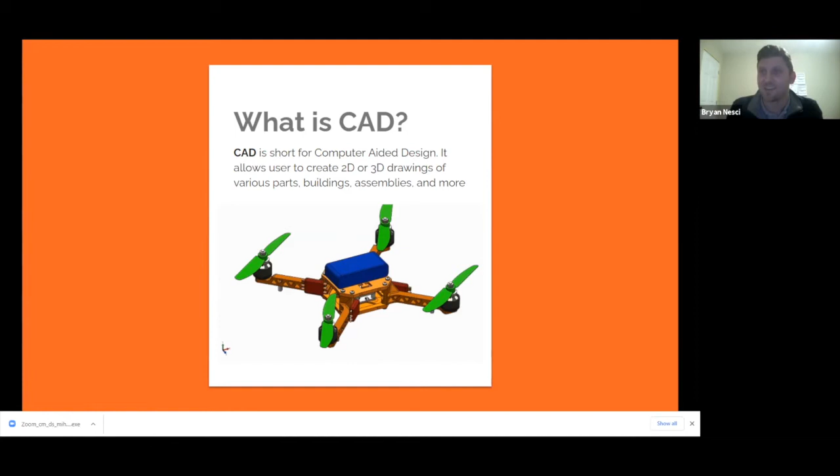So we can see the assembly below. Everyone knows what a quadcopter is. So that is actually an AutoCAD rendering of a quadcopter. You can see that it kind of helps you to lay out all the parts, and you can actually build and assemble items like a quadcopter in the computer program by designing each individual part.

So it's like a language. And like anything else we do in the world, we have to learn the language in order to communicate. CAD helps us communicate ideas to the world. We have something going on in our head, some idea, and it's really hard for me to explain an idea to you without sometimes showing you what it looks like. So that's what CAD helps us do.

So that brings us to the next part. Who uses it then? Who uses AutoCAD to convey their messages? What kind of careers are out there? What can I do with this? So like I said, in engineering, AutoCAD is the first thing that you usually learn when you're a freshman in college.

And so for mechanical engineers, you're usually in the top left corner, putting together mechanical parts. This is an assembly of a bearing sleeve. Someone designed this assembly, and you can see that it's kind of pulled apart, so that's the way we can visualize what each piece is. It's labeled — it has all the parts labeled, it has the base labeled, it has everything labeled.

So mechanical engineers, civil engineers, biomedical engineers — engineers who are designing pieces that go inside of your body, whether it's a fake shoulder or a fake knee — they're designing it first on AutoCAD before they ever bring it into the real world. Now, on the bottom left, we see this open layout of a house.

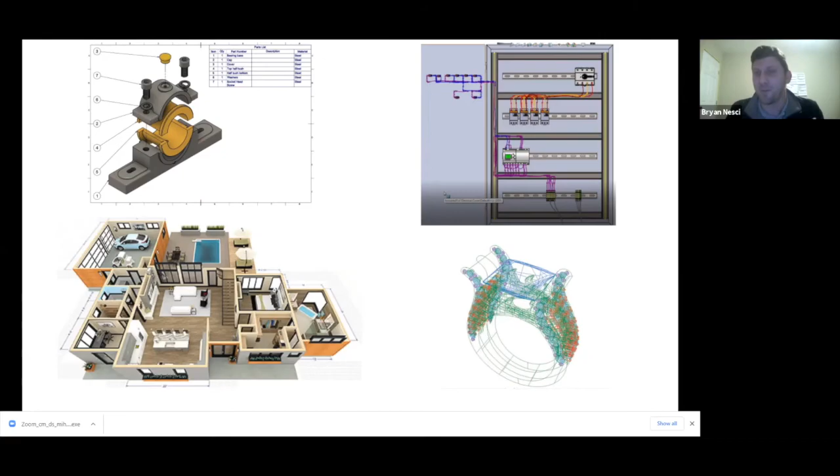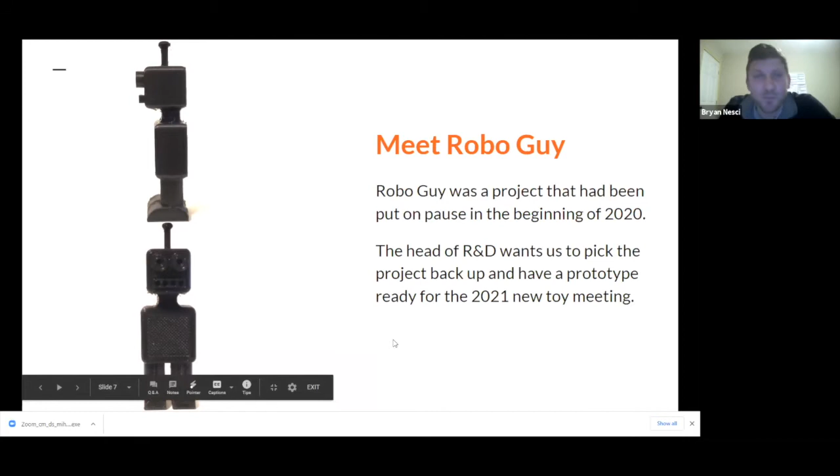So let's take a look. Let's meet Robo Guys. This needs to be launched in 2021. So what we're going to do is follow the engineering design process.

So ask, identify the need and constraints. He already gave us that this needs to be launched pretty quickly, so we need to prototype this fast. We have the original unfinished product.

And he also said that we needed to add something. We need to add an LED screen to the front. So let's keep that in mind. Let's jump to the research part together.

All right, so what I'm going to do right now is take a look. I'm going to switch my screen over so you can see what I'm doing. So I'm going to get it out of present mode, and we're going to put together a better picture of who this guy is and the measurements of him.

So I have some of the measurements put together. We're going to break it down piece by piece and get a better idea of exactly what this guy is in terms of all his measurements, so that we can take it and put it into AutoCAD and fix it up and put whatever we need onto him or modify him the way we see fit. So let's do that now.

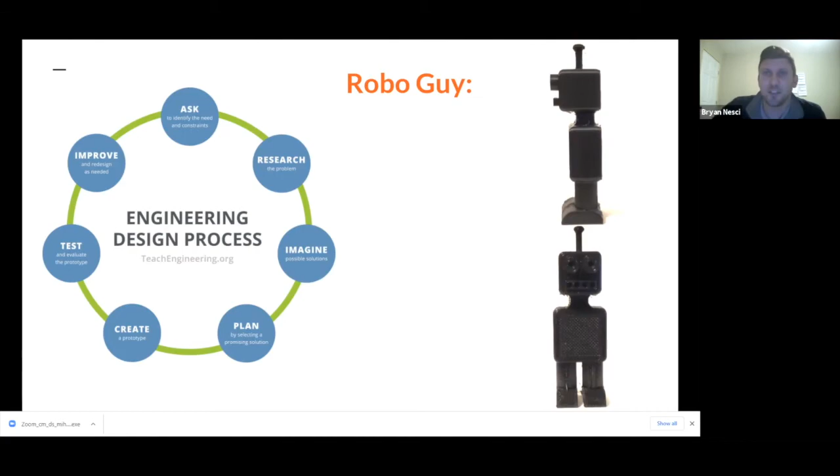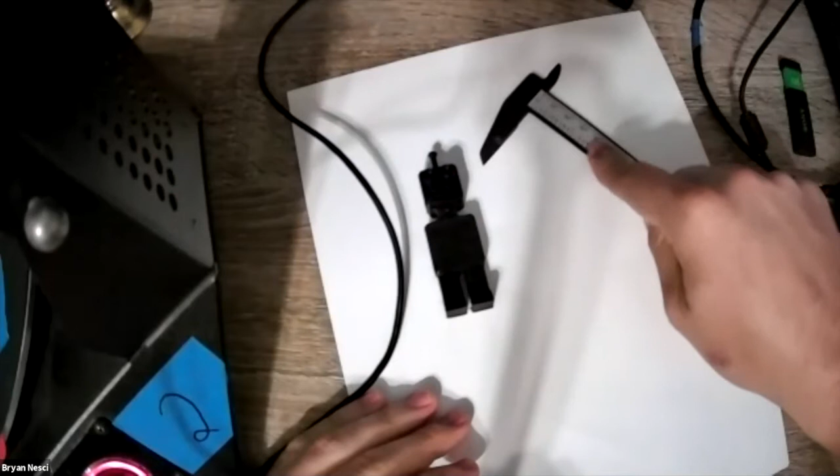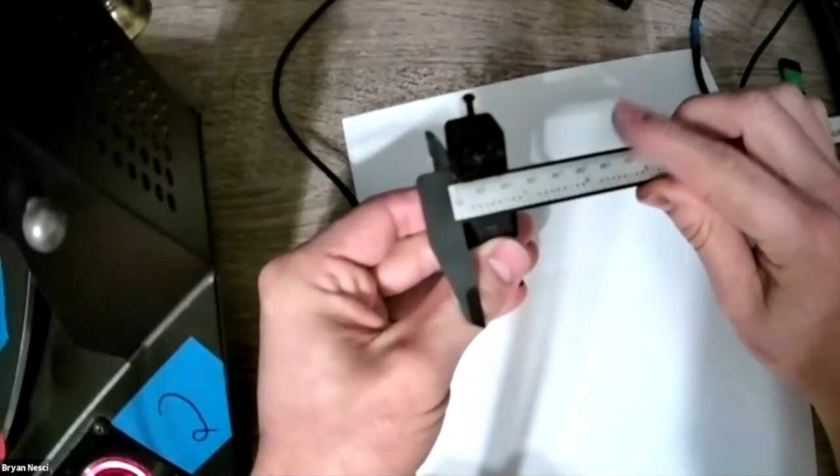Okay, so here's Mr. Robo Guy. What I have here is a caliper, so this will help me take measurements. Now I have some of the measurements, but I just wanted to show you what we do. So if I want to take a measurement of the head, I'll put it like this, and I'm reading in millimeters. Right now it's reading 19 millimeters.

So what we're going to do is create a profile of the robot. I want to break it down into its main components. We have his head, which includes his antenna, his eyes, his mouth, and we'll even say his neck part. Then you have his main body, two legs, and his feet.

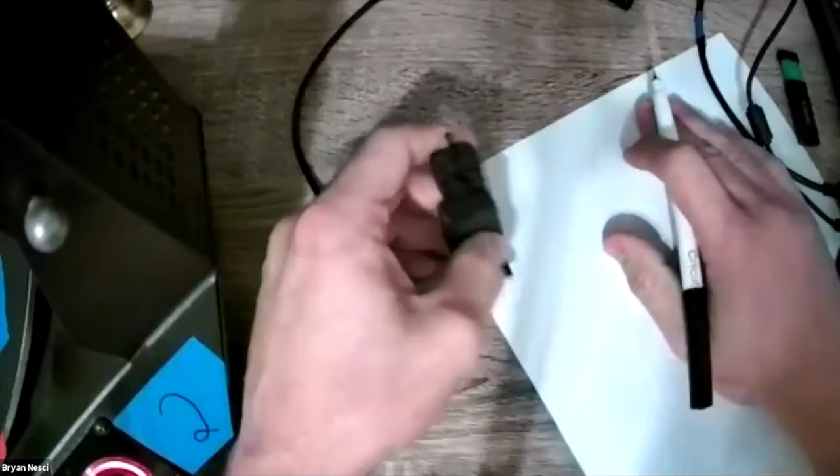So what we're going to do is write down all the measurements, and we're going to put them together so that we can take all of those measurements and transfer it over to the CAD software, which is AutoCAD.

His head looks pretty cubic, so we're going to draw his head first. So we're going to write down head, and we're going to sketch a cube.

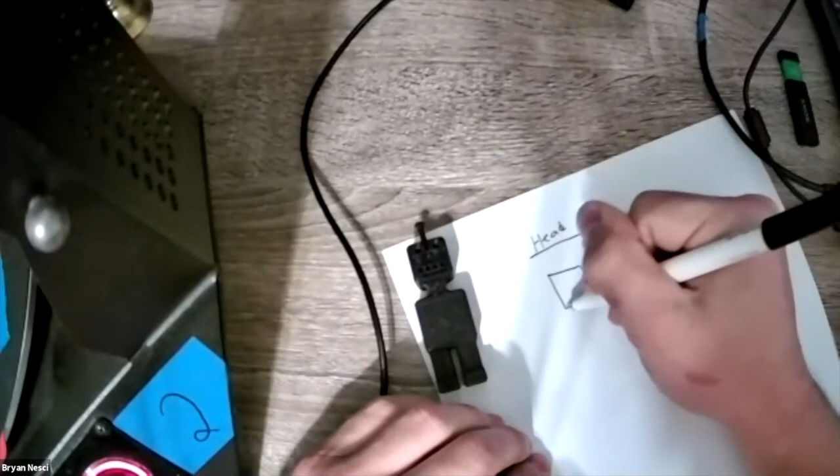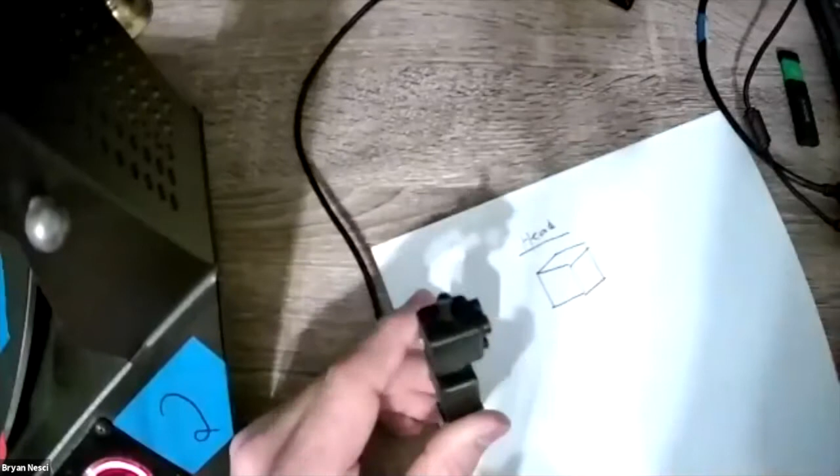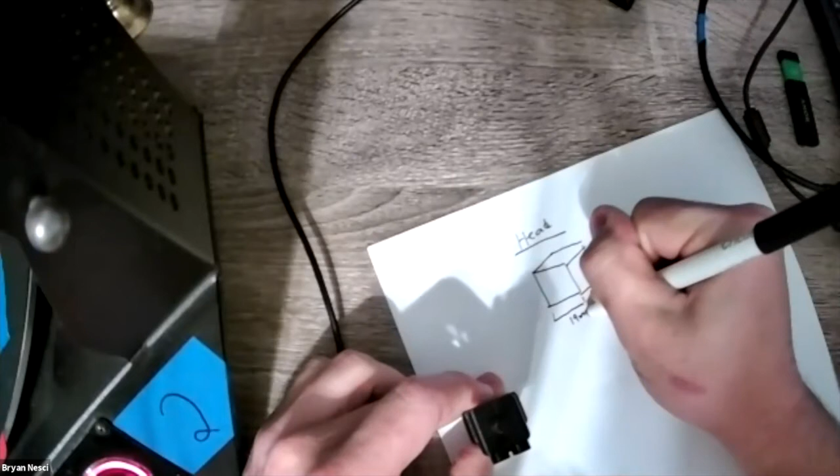Okay, so like I said, it was 19 millimeters. And when I took the measurements of the other side, this way and this way, everything is 19. So we're going to have 19 millimeters by 19 millimeters by 19 millimeters.

This is our SolidWorks. This is the program that by the end of my class, you'll be able to use like any other video game, right? I know all of you probably play video games. All of my kids play video games. This is just like a video game for adults who are creating things. This is like Minecraft. I have some kids in my class who say, can we make this in Minecraft? I say, yeah, you can, but you can make something real in this one and actually print it.

So let's start. Just like we saw a moment ago, we're going to pick a plane. The first plane I'm going to pick is the front plane, and we're going to start with the body of the robot. It's the biggest part, and I think if we start from the body, we can go up and do the head, then go down and do the legs. And as we go through this, I'll show you all the little things that I do and what everything means.

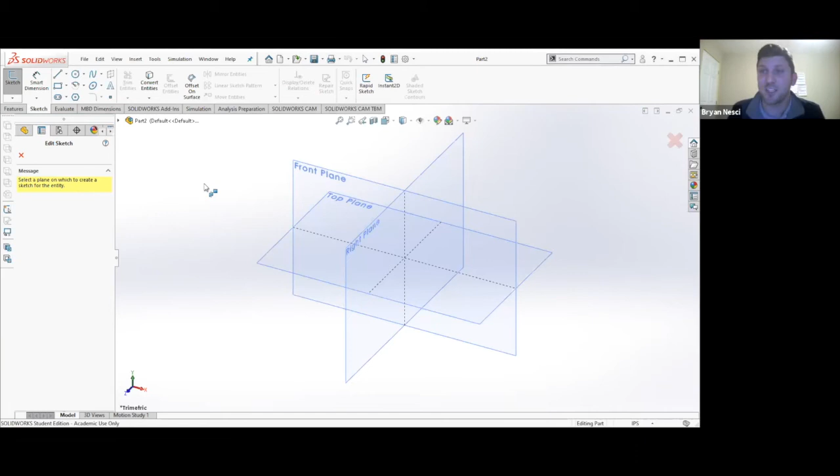So as I was saying, the word that I keep mentioning is sketch. Right up here at the top, we have sketch. So I'm going to click and hit here to create a new sketch. Automatically the program says, all right, where are you going to sketch? Because you have to sketch somewhere. We're going to sketch on the front plane. All right.

So the body of the robot is, if we look at the front, a square—25 by 25. So here are all of our shapes. It's kind of like if you've ever used Google Docs, Google Slides, or Microsoft Word. If you create shapes in there, it's the exact same way.

So you're going to look for the shape you want, select it, and put it on the screen. Now, this is a little more specific because it wants to know exactly where you want to place it. So we'll click a corner rectangle and hover over the center here. This is what we call our origin.

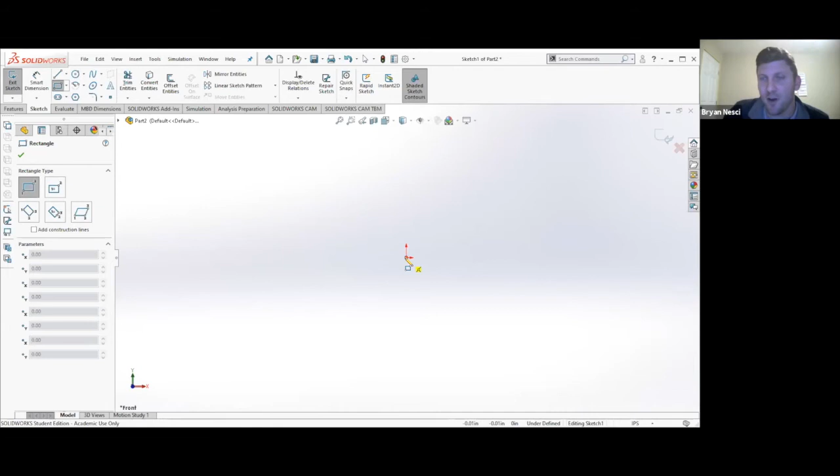So in math, we have the origin, the 0,0 spot. That's the 0,0 spot of our entire sketch area. So we're going to click once, click twice, and now we have a rectangle in the middle of our graphic area. The graphic area is just where we're making our sketch here.

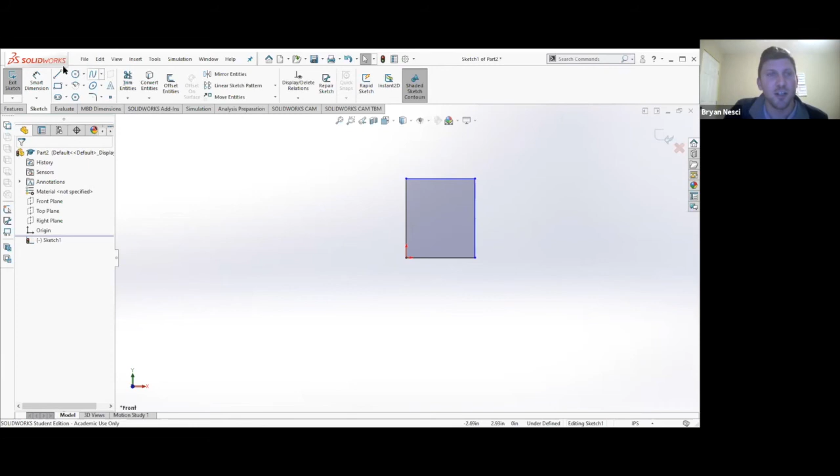So now we're going to smart dimension. This is where we put in the dimensions we found before. And I forgot to mention, we were working in millimeters, so we need to change our units over to millimeters. There we go.

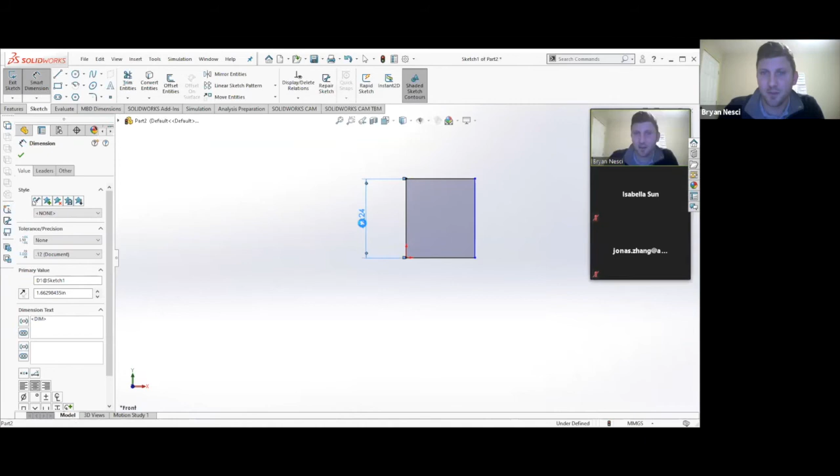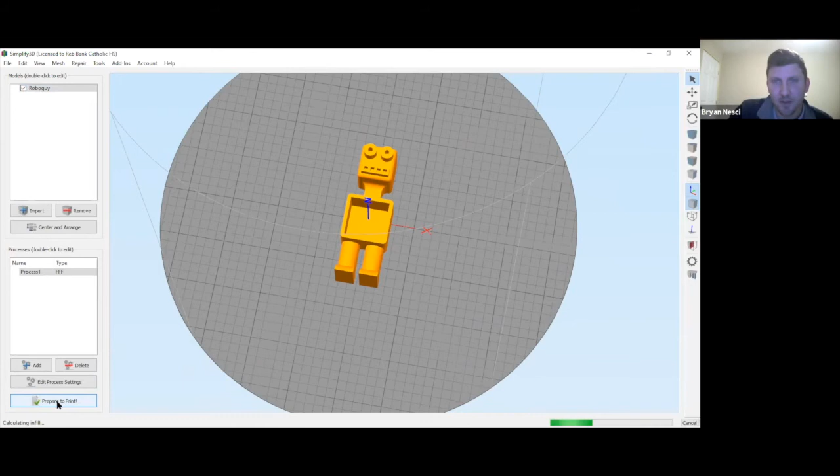When we go to hit prepare print, the program tells us a lot of information. It says the build time is 1 hour and 12 minutes. Well, that's not going to work for us unless you want to stay here later. And the cost of the material is only 58 cents, so this little guy will cost us 58 cents.

It tells us the plastic weight, how much plastic it's going to need, and the filament length. We'll get to what that means, because the way the 3D printer works, you'll understand that it needs a certain length of material—it takes like a string, melts it, and creates the part.

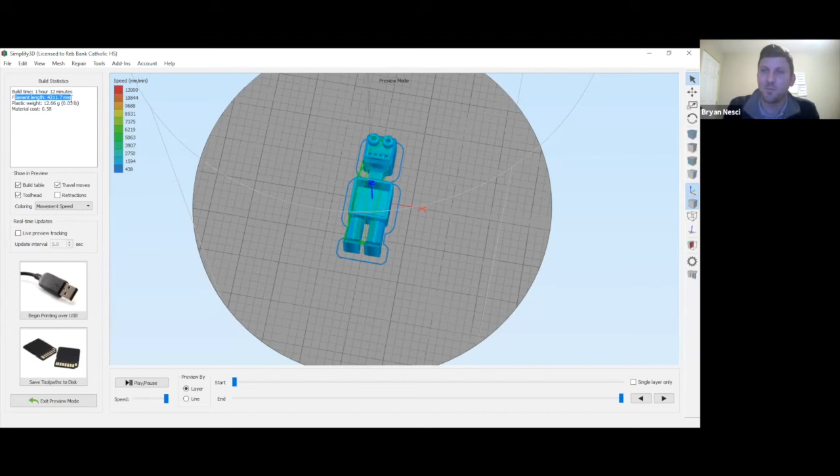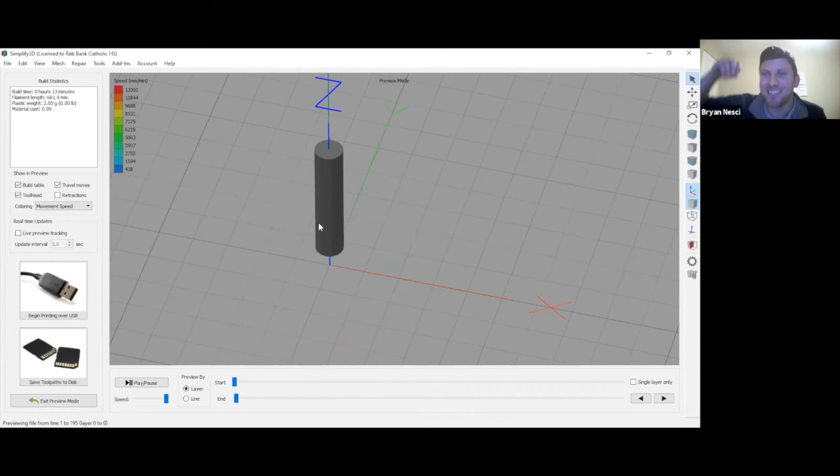This is what it's going to look like. You can see all of the detail of where it's going to lay plastic down. It lays it down like, if anyone has ever used a hot glue gun, it lays it down. And I'm going to show you virtually here. So this piece right here, that's where the molten plastic is coming out—it's oozing out of this needle-like head.

And it's laying down all these different layers. All those different lines are where that head goes over and runs with the hot plastic. So we're going to jump over and look at the 3D printer and get this thing started here.

So this is our 3D printer. I'm going to hit play and scroll down. Robo guy.

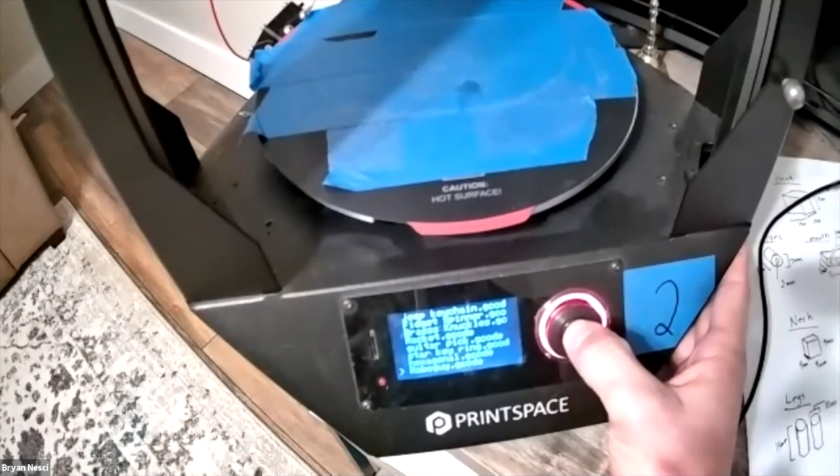So again, we've got a couple minutes here. So, again, what's going to happen here is this piece is the hot end.

That was that needle, and you can see there's this kind of wire going to it. Inside that wire is plastic, which is seen right here. So this is the plastic, and there's a reel up on top. That plastic is on a reel, and it goes down, then gets put in and pushed through the top of the hot end.

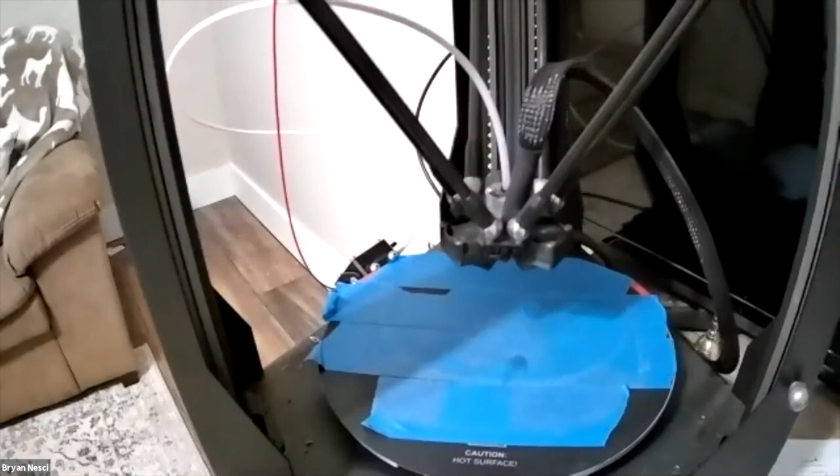So now it's laying down the first layer of Roboguy. Now we've got our first layer down of Roboguy.

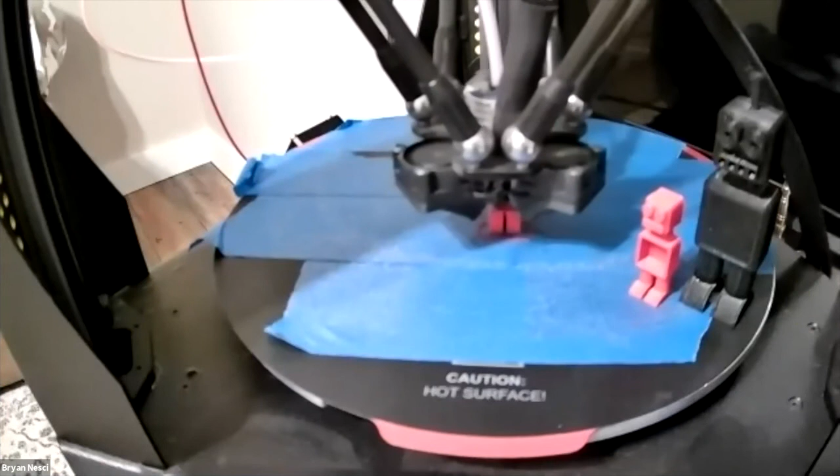All right, so now what you see it doing is actually laying the top layer of the head. Remember the face is solid, so right now it's printing it hollow, and now it's filling in the top so it has a top layer. We'll do it again, and you'll see it zigzag.

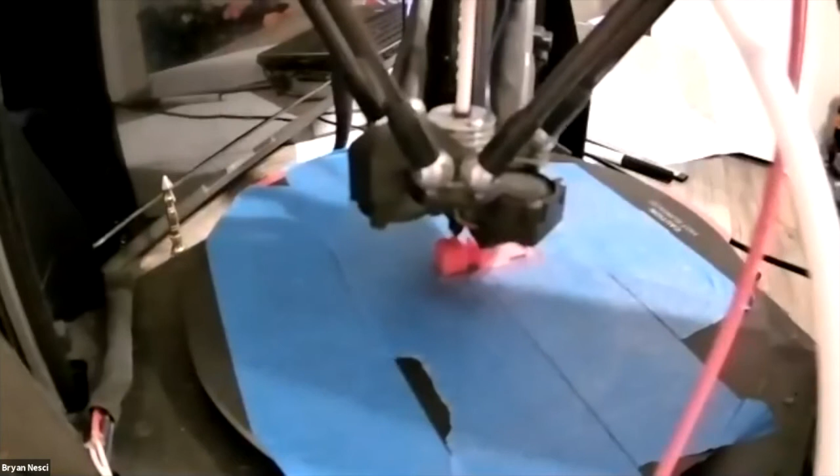We're at 85%. I'm sorry for you guys who are tired or want to go play your video games, but all right, so now you can see it making the eyes and the mouth. So here we go.

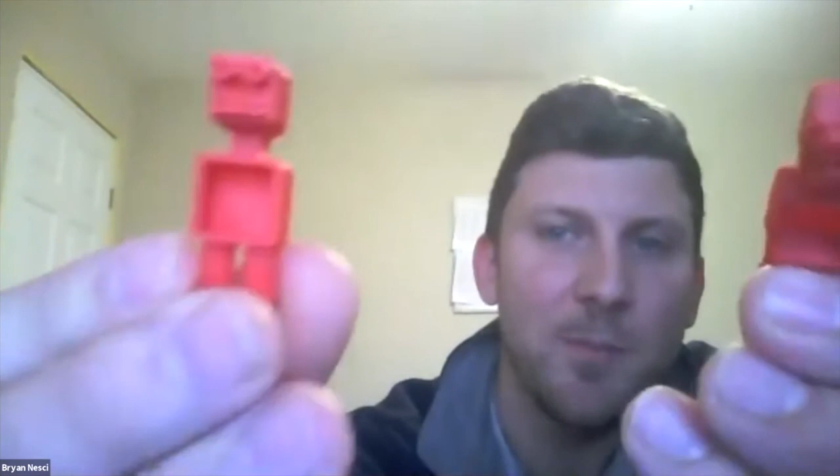Robot number 2. We didn't put the arms on because we ran out of time, but we got our prototypes here. So we're ready—we've got a little robot family now.